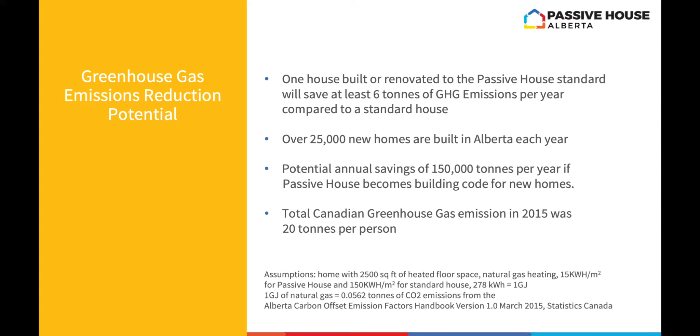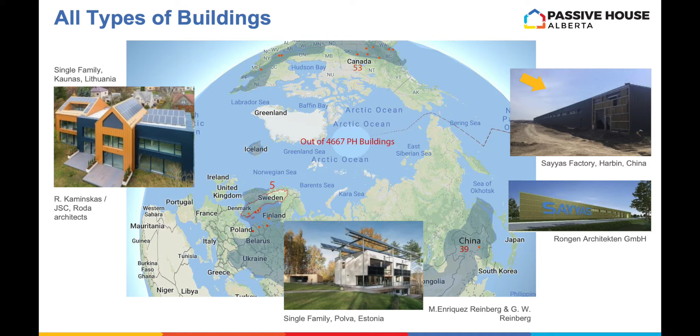Which is about a 100 amp panel. So by the same extension, if you are building a house now to code minimum, we're already under the 2017 energy code for buildings. There's already a 2019 energy code for buildings that's written that we haven't adopted. But the 2030 energy code for buildings is essentially net zero ready. So by building to passive house or net zero standards now, you're protecting yourself from possible future costs when you sell the house to bring it up to new codes. Now we don't know exactly how that would be enforced and what they'll make you come up to, but it is kind of insurance to be building above code now.

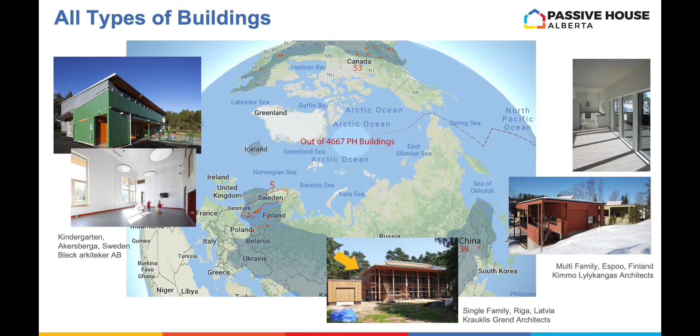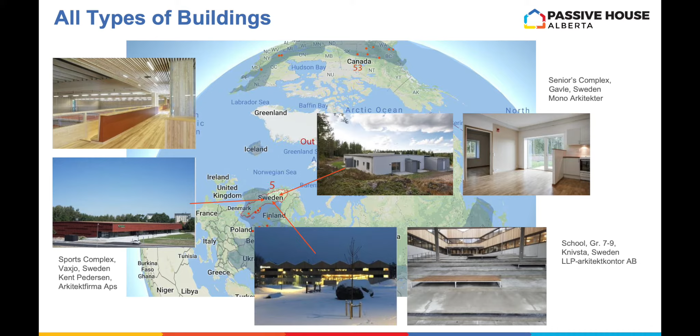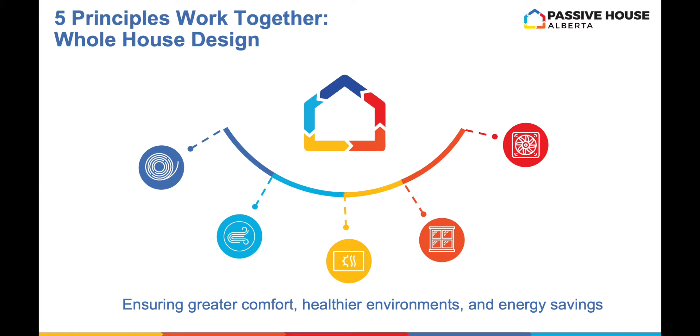And so this is the advantage. Just from the energy reduction, that 90% energy reduction, you'll save about 6 tons of greenhouse gas emissions in your house per year compared to code minimum. So it's a non-insignificant amount, and that's just operational from the energy. There will probably be more. All my assumptions are down there - that's an average house, natural gas heating.

So here's some kind of worldwide examples of passive house. This is from the passive house database - a database that you can get access to, and it kind of lists all of the certified passive houses around the world. It only has 5,000 buildings, it's a few years old. So there's a single family in Lithuania, a single family in Estonia, a factory in China. Again, it's not just houses - it's all types of buildings and all types of climates can be built to the passive house standard.

Here's a kindergarten class in Sweden, so it's nice to get kindergarten kids in high quality environments. A single family in Latvia, a multifamily in Finland.

So here's some, I guess, more cold climate examples. We've shown that it does work in our climate. So there's a sports complex in Sweden, a school in Sweden, and a seniors complex in Sweden. Those are some bigger complexes, multifamily, but they're all built in a cold climate to the passive house standard.

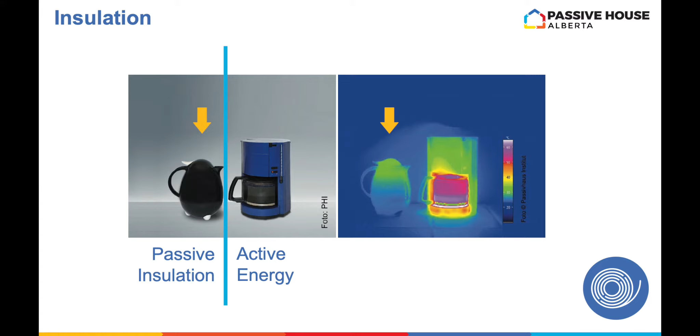Now we're going to go over the 5 principles of passive house. So it's 5 principles - it's not pick 3 or pick 4. You need all of them. They need to all be applied correctly to get all the benefits out of the system.

First principle is insulation. So this one should make pretty good sense. When it's cold out, we put on a big giant jacket, we put on our toque, we put on probably snow pants, we put on big winter boots. We put insulation everywhere on our body.

If we happen to be in Vancouver, we would probably wear a less insulated jacket because it's warmer there. But our houses, we can't put jackets on and off our houses, so we kind of have to dress our houses for the worst case, which means lots of insulation in this climate everywhere. And what we're trying to do is, right now we're all in code minimum houses, we're all kind of living in those glass coffee pots.

So they stay warm as long as there's a continuous source of heat to the bottom. The second photo is of a thermal imaging camera. So again, that coffee pot is very hot. There's lots of heat from the bottom keeping your coffee warm. So that's our big furnace, keeping our coffee warm, because the heat's all escaping from the glass.

What we want to move towards is passive insulation that just sits there. That's kind of your thermos or your insulated sealed cup. You put in cold water, you put in hot water, the insulation sits there and keeps that water at that temperature for a long amount of time. You don't need energy, it just sits there and does its job forever. So that's kind of what passive house does - you want more passive insulation.

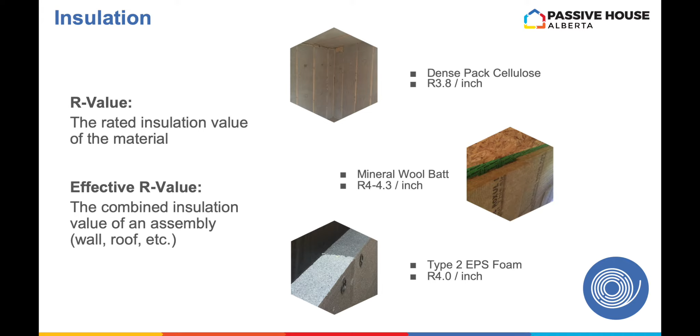So here's 3 types of insulation. The top one is dense packed cellulose. Dense packed cellulose is recycled newspaper. It's a good product because it's recycled. But of course, since it's newspaper, you're like, oh, that can burn and rot and mold. So what they do is add borate to it, which is a naturally occurring chemical additive. That additive is a flame retardant, it's also mold resistant, and bugs and animals no longer want to eat it because it's toxic to them. But it's not airborne, it stays in the product, it's not toxic to us, it doesn't off-gas.

Next we have mineral wool. Two main manufacturers: Rock Wool, or old Roxul - they've renamed to Rock Wool - and there's also Owens Corning, which has their Thermafiber material. Mineral wool is basically rock slag, a waste product from blast furnaces. What they do is heat that up, spin it into long strings of molten rock, and then put it together in mats that become fluffy. So it does have insulation value because it's fluffy, and because it's rock it will never mold, never rot, and it's very hard to chew through. It's actually a little bit hydrophobic - it repels water because it's a rock.

The third one down is type 2 EPS foam. EPS foam is the white styrofoam you're used to seeing in styrofoam cups. Its blowing agent, or how it's made, is they basically make bubbles with air, so it's a very low cost option as well - compared to blown cellulose, mineral fiber is a little bit more. But there are other types of foam with different blowing agents that use more chemicals inside them, and those have slightly higher R values, but they have some other concerns with them.

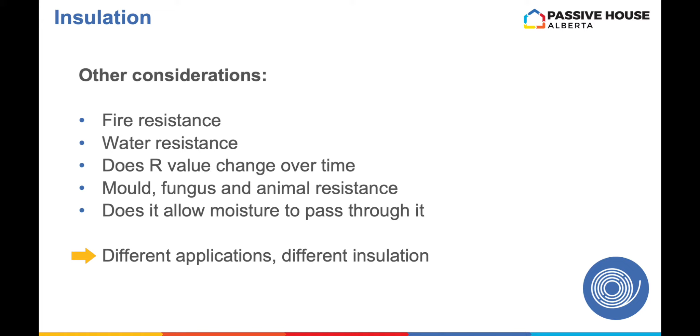So you want to make sure that if you're using foams below grade or near grade, you're covering them with some type of membrane or otherwise stopping mice and birds from getting in there. We don't have a lot of carpenter ants here, but who knows, we might in a few more years. You want to keep those animals out of your foam. Once you're more above grade you don't really have to worry about it, but the 1 or 2 feet right at grade is where your foams can become tunnels or homes for other things.

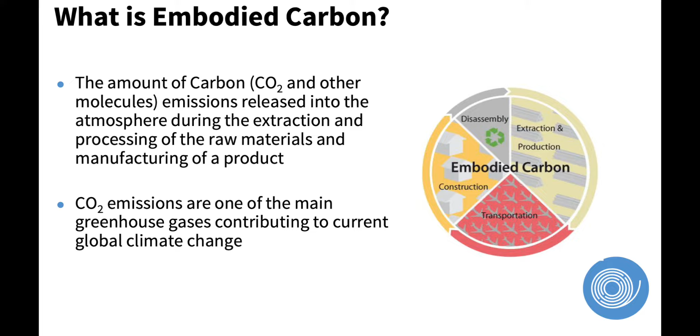Does it allow moisture to pass through it? This is another term - it's called vapor open or vapor closed. You might have also heard the term breathable. Houses don't really breathe, it's just a common term because of Gore-Tex. Gore-Tex is called a breathable fabric, but it's actually not - it's a vapor open fabric. Vapor open means it allows water vapor to move through it. A vapor closed material, the best example is poly or some types of foam, are vapor closed, so no moisture can go through it.

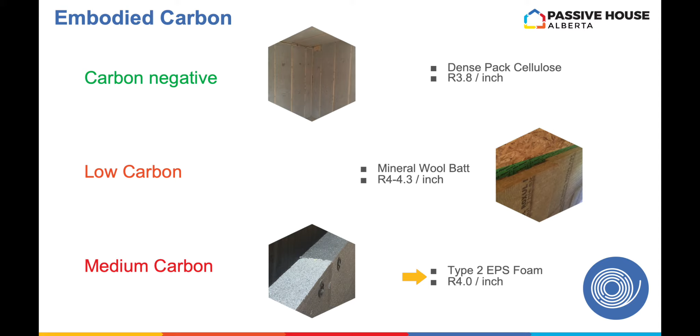That's a good thing below grade - if no moisture can get through it, then below grade you're going to be wet, but it's not a concern. Above grade, most people, for safety and resilience, prefer a more vapor open wall. Vapor open wall means the moisture can get out. The reason you might want that above grade is that no one's perfect - they're built by humans, and humans make mistakes. A blower door test will check most things, but moisture still might get into your wall.

So if it's a vapor open wall, you now allow that moisture to get out. You always make sure it's vapor open to the outside, but if you have a poly or vapor closed vapor barrier, it means you can't dry to the inside. If you have a vapor open vapor barrier on the inside, then it can dry both ways. Again, different considerations for different applications, but you need to think about all these things, or pay someone to.

The other thing you need to worry about with insulation is embodied carbon. Right now Passive House is only an energy efficiency standard - it does not officially care about this. When version 10 of Passive House comes out, it will have this in it. We've only been worrying about this for 2 or 3 years, so all the standards are catching up. Embodied carbon is the amount of CO2 equivalent released into the atmosphere in the extraction, fabrication, and manufacturing of a material.

And then transportation of that material to the site - that's basically what's called embodied carbon. Some people are calling it upfront carbon or pre-occupancy carbon. It's basically the amount of carbon that you've released before you moved into your house.

Before you've even turned on the furnace or the heater, there's already carbon that's been emitted. The reason we need to worry about this is different insulations and materials have different embodied carbons. Blown cellulose is carbon negative, mineral wool is low carbon, and type 2 EPS is more of a medium carbon. This slide gives you a graphical representation of what that means.

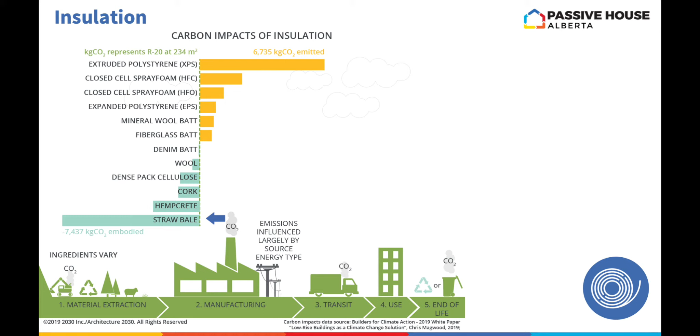Next we go into carbon negative materials. You're like, well, how does that work? Basically it works by being plant-based. Plants are the first and best carbon sequestering machine - they pull CO2 out of the atmosphere, and through photosynthesis, turn that CO2 into cellulose in their plant structures, in their body. If we harvest that cellular structure from trees or plants or straw or whatever, and put it into a building, like a passive house that's going to sit there for 50 to 100 years without rotting, without molding, without re-releasing that carbon back to the atmosphere, you have sequestered carbon. So that is how you are carbon negative - you are taking atmospheric CO2 out of the atmosphere from a plant, taking that plant, and putting it in a building that doesn't burn down, hopefully, or doesn't go anywhere.

Wool is from a sheep - it's pretty sustainable, you just shear the wool off a sheep, and the sheep grows more. That's why it's carbon negative, because there's not much besides a shearer to harvest it. Dense packed cellulose is getting pretty good on the negative side because it's all recycled newspaper. Cork is a little bit more, because again, you just peel it off of a tree. It's a little bit more expensive, but it has some other really neat properties because you just shave the bark, which is the cork, off of the tree, and you can keep doing that year after year after year.

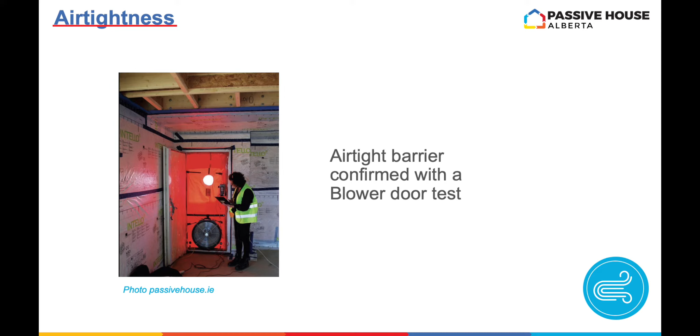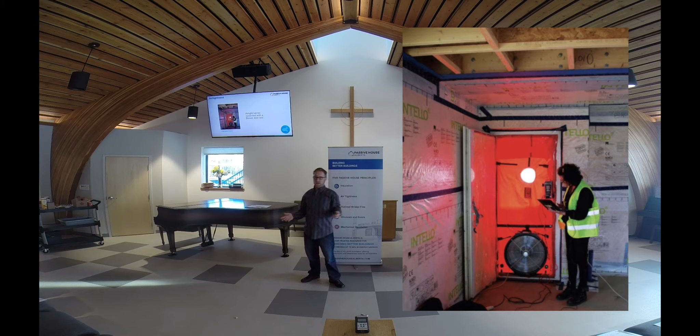Hempcrete is made out of hemp, which is kind of a straw or stalk from the hemp plant, and then it's mixed with a lime plaster to turn into hempcrete. It's similar to concrete, but the cement in concrete actually has a very high embodied carbon - cement is responsible for 6% of all the greenhouse gas emissions in the world. So the cement companies are trying to improve that. They're trying to move off of having to heat up lime to make cement, using more renewable energy instead of gas to heat the furnace, and trying to change their chemistry to get off of it. The other way to do it is through alternate cementitious materials like fly ash, slag, more lime, or basically concretes that reduce the amount of cement in them - that's how you reduce the embodied carbon of concrete. But by using hempcrete, it uses a lime plaster, which isn't cement.

The best one is straw bale. The reason it is the best is that we create a lot of it - it's the stalk below the wheat, and we want the wheat at the top. The straw has no nutritional value, so some people with animals might use it as bedding for their horses, but there's generally a large surplus of straw that is already packed into a nice bale.

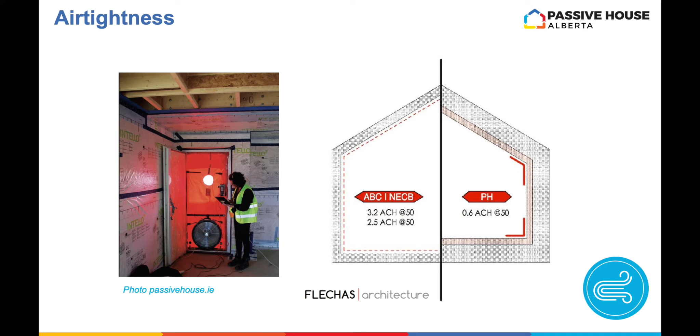If you just use that bale directly as insulation in your house, that's great. There are also some people out east that are taking that straw and either dense pack blowing it in or chopping it up and making straw panels of it. But yeah, straw is one of the best ones. It's not really commercially available right now in Alberta, but hopefully it will. So that's insulation. There's one.

Number 2, airtightness. Back to the analogy of putting on your warm winter jacket. What airtightness is, you want to zip that jacket up. If you don't zip up your jacket, what happens is the wind comes in and all that nice warm air that you warmed up, or the warm air that you paid to heat up in your house, just gets blown out through the cracks. So that's why you want airtightness.

The way you test airtightness is through a blower door test. That's what that picture is, where basically they stick a fan in your door and then pressurize and depressurize the house, and then through some calculations come up with the size of hole, that equivalent hole, or the measure is air changes per hour. So it's basically how long would it take all of the air in the house to seep out through the cracks. So passive house requires 0.6 air changes per hour or under.

Code before 2011, or NECB 2011, there was no air change requirement. Now we have 3.2 air changes at 50 pascals as a code requirement. However, there seems to be so many wiggle rooms and subclauses in the code that a lot of people are still building a house without doing a blower door test. So you really don't know.

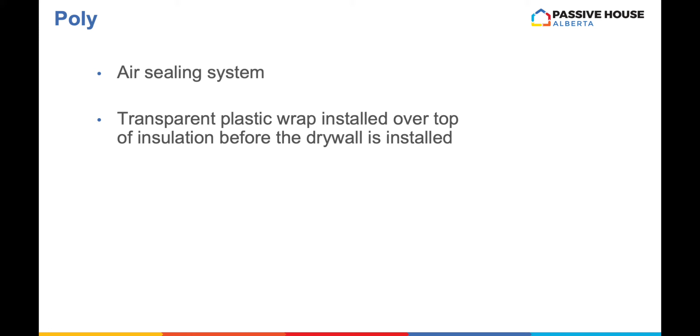Probably a few years ago, we were doing 5 air changes per hour. I've heard of a test of a recent building that was 14 air changes per hour. So that means every 5 minutes, all of the air in your house is out of your house. Like, just leave the door open. You are leaving the door open.

And the 0.6 sounds scary. Once you start using the right materials and simplified details, it actually isn't. When we see the examples from Alberta, pretty much everyone's blowing kind of 0.3, 0.4. So once you start to think about it, it isn't that difficult.

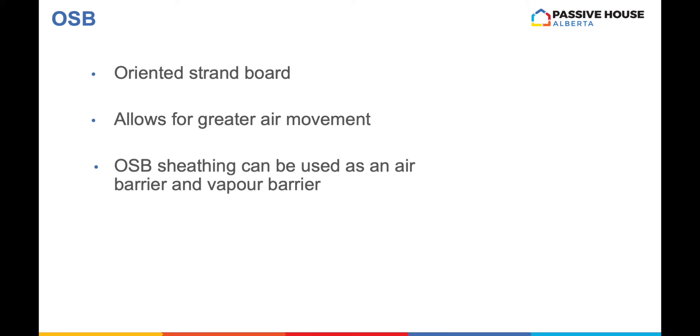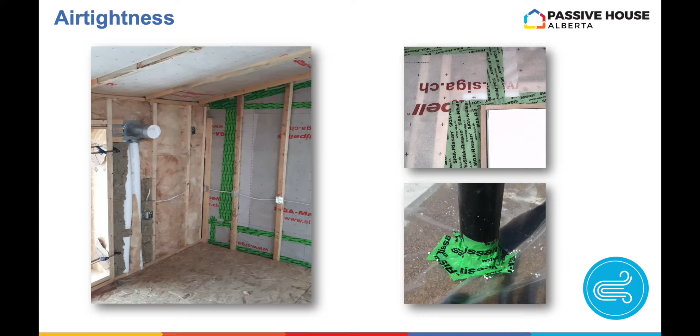This is a Siga tape. This is one of our other sponsors. This is their interior tape, it's called Rissan. The white one is Wigluv. Funny names. It's the exterior tape. This one isn't officially rated to work in cold, works to about 15, but you could probably get it to work a little bit.

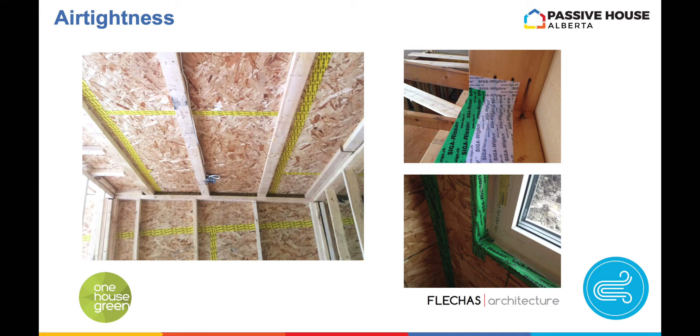What you will notice with both of those tapes is they're vapor open and they're stretchy. So what that allows you to do is, if you worked with tuck tape, the red tuck tape, it's vapor closed. So if you get an air bubble, you can't get that air bubble out. With the vapor open tapes, you just push on it and the air will come out. And also because they're stretchy, they're a lot easier to fix and actually get smooth if you're not perfect. Whereas the tuck tape, if it kind of touches itself, you're kind of messed up.

So these are different ways to do vapor barriers. Below grade, you can use still poly. You can use poly above grade. It's trickier to get durable, but you can use poly with high quality tapes. You can also use membranes, and you just basically are taping all of your corners like you did before. You're just being more meticulous with it. But you actually don't have to use a membrane.

The vapor barrier has to be on the inside. The airtightness layer can be anywhere in the wall, or you could have more than one airtightness layer. What is often done is you combine your airtightness layer with your vapor barrier. And you can do that with OSB. If you use OSB and tape it with correct high quality tapes, and it's 7/16 OSB, that meets the requirements of a type 2 vapor barrier. And then your vapor barrier can also act as a shear for your house. So if you see on both of these pictures, if you use a membrane, you need to protect it.

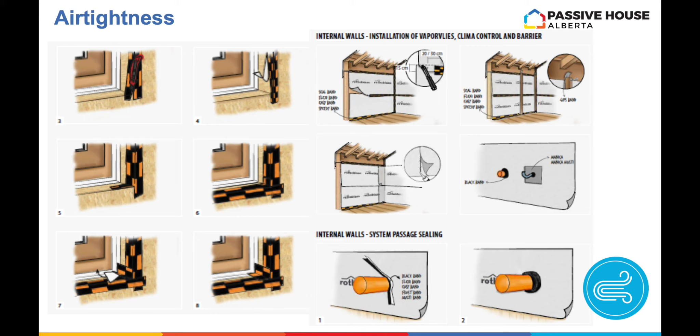So this is my house, there's an installation cavity on the inside, and that membrane, you can see the electrical running in that installation cavity. You do your vapor barrier, you do your blower door test, make sure it's below 0.6, then you put in the installation cavity, and all your electrical and plumbing runs go in that cavity, so you're never touching your vapor barrier again. And if you ever do a renovation, you can do whatever you want - pull off your drywall, change your walls behind it, but you're not touching the vapor barrier.

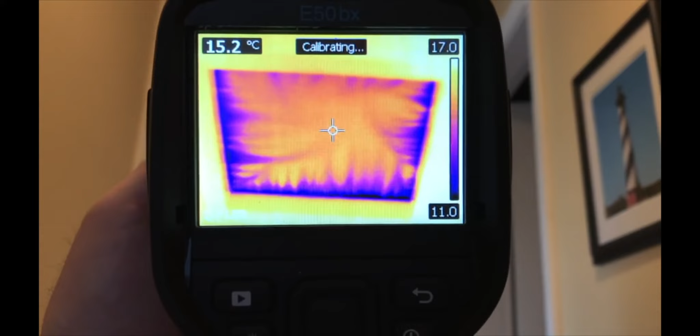If it's OSB, in that picture they did do an installation cavity, so you can do that with OSB too, but OSB is a pretty durable material. If you put a screw in the OSB or a nail, just leave the screw there - that's what you do through the drywall into it. Or if you take the screw out, put a dab of caulking or mud it and paint it, and that will make it airtight.

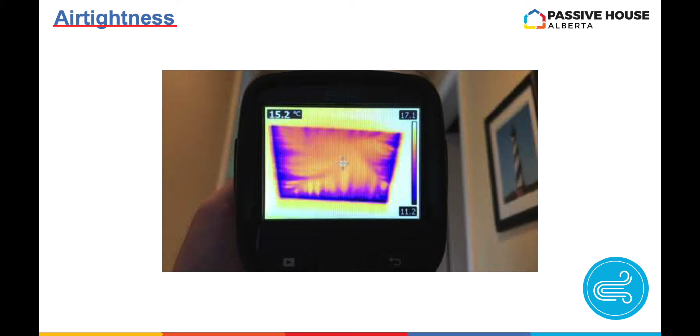If you're doing a renovation, you cut away the drywall, since the drywall is on top of the OSB. Cut out the OSB, do your renovation in the wall behind it, then cut your drywall another 6 inches wider than the OSB, put a new piece of OSB on, tape the old OSB to the new OSB, and you're back together. Then put your drywall on.

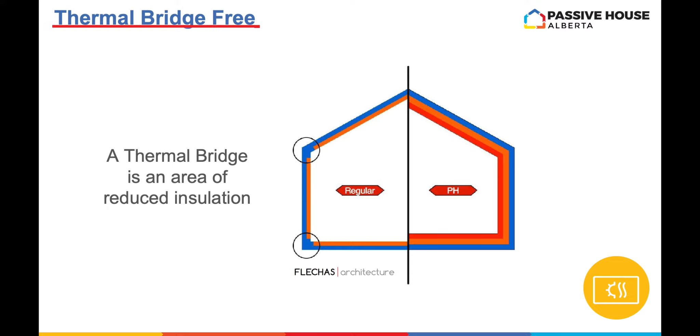So a lot of people do put an installation cavity on. On the most recent house I designed, I didn't - I used that OSB tape for that reason. It allows you to use more of the low-cost dense-packed blown cellulose, and not have to do as many different layers on the wall. But again, there's different options.

Both Siga and Rothoblaas and all the other manufacturers want you to succeed - they don't want you to fail your blower door test. So they have very good manuals, and they have training to make sure you do it right. So it's about using the right materials and keeping your details simple.

So when you do your blower door test, you do thermal imaging at the same time, and you literally see where your holes are. So the first time, you kind of plan to fail your first blower door test. You do the thermal imaging camera, then you come along with tape and go wherever there's a staple hole or a small hole, and on your second test you should pass. You can visually see the air leakage with the thermal imaging camera. So that's why it sounds difficult, but if you use the right materials and equipment, it isn't.

So that is number 2, that is airtightness.

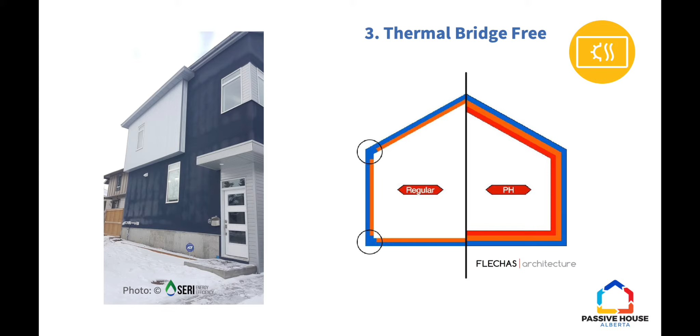The next principle is thermal bridge free. A thermal bridge is any area on the building that has a lower effective R value than the rest. Back to the coat example - if you put your coat on and zip it up, your zipper is a thermal bridge because there's no insulation at that zipper. So what lots of coats have is an insulated flap that goes over the thermal bridge to reduce it. What we're seeing is every single stud, and wood is about R1. You have insulation in that wall, probably R20, but then when you have R6 or R4.5 from your stud and nothing else, thermal bridging is coming through and melting the frost on the outside of that building.

This is a recent home, a 2019 home in Calgary. Studs are always a thermal bridge - it's a thermal bridge you really can't eliminate. So some thermal bridges you want to eliminate, some you want to mitigate. You want to mitigate the thermal bridges from your studs, and also from your rim joist - rim joists are almost always a thermal bridge. Another type of thermal bridge is called a geometric thermal bridge - that's a corner.

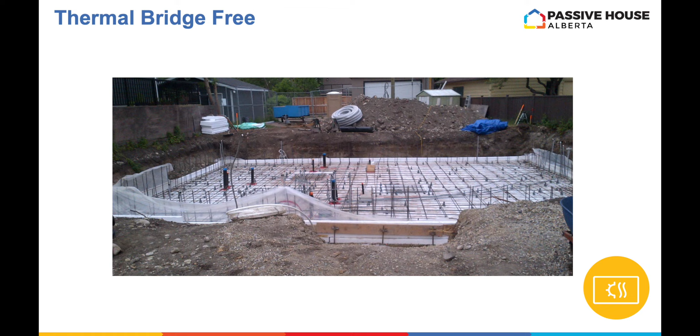Start with a rectangular square box and have a good reason to change from it. When you go into a deeper passive house wall, because you have more insulation space, you can come up with details that totally remove that thermal bridge by minimizing how much structure you have relative to insulation. So that's one example of a thermal bridge.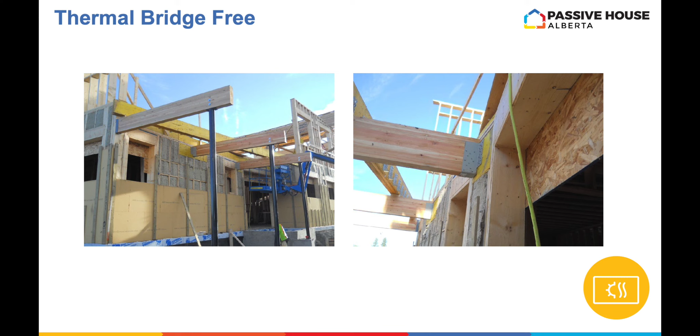Here's another example of a thermal bridge: right now code doesn't require us to put any insulation below the slab. When I go outside, I put boots on or my feet would get cold. About two meters down below grade, the temperature is the average annual temperature of the air in that location. In Alberta, it's about 5 or 6 degrees. So 2 meters down, the ground is 5 or 6 degrees. If you want your basement slab to be more than that, you need to insulate it.

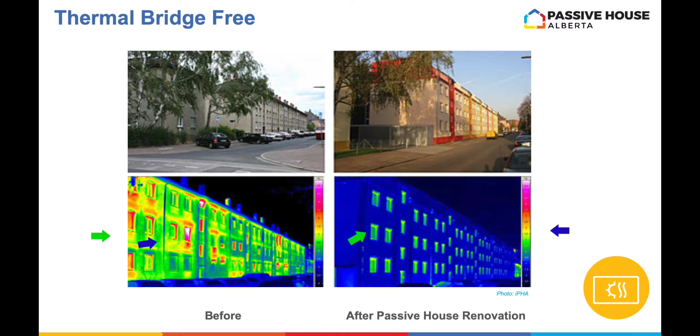These are 2 other types of thermal bridges. Architecturally, a lot of architects like the look of a beam going from the inside all the way to the outside. If it's a wood beam going from inside to outside, it's like a highway for heat to go out of your building. If you have a steel beam going from inside to outside, it's like a super highway for heat to go outside the building. To eliminate that thermal bridge, you just cut it off and attach it to the structure on the outside, so it's no longer a thermal bridge.

The other example is Roxul or mineral wool in between the studs, but there are a fair amount of studs—like studs at 2 feet going both ways—so that would be a large thermal bridge. What they've done is add, I believe, a wood fiber board, about R5, on top of everything to reduce that thermal bridging. This is another type of material, wood fiber board, that you could use on the outside that you don't have to worry about condensation with. It's very vapor open—if it becomes a condensing surface, the moisture will come out right away. Some of the wood fiber boards can also take some structure, some shear.

So again, this is a thermal imaging camera of a building. This is before the passive house renovation, and this is after the passive house renovation. Again, you can look at the windows—that green of a passive house window, the glass is about R9 to R11 at center of glass, which is about the equivalent effective R value of a 2x4 wall. So the windows in a passive house are as good as a 2x4 wall. And the rest of it is all blue—no thermal bridges, all perfectly cold. That's how you get comfort and no drafts.